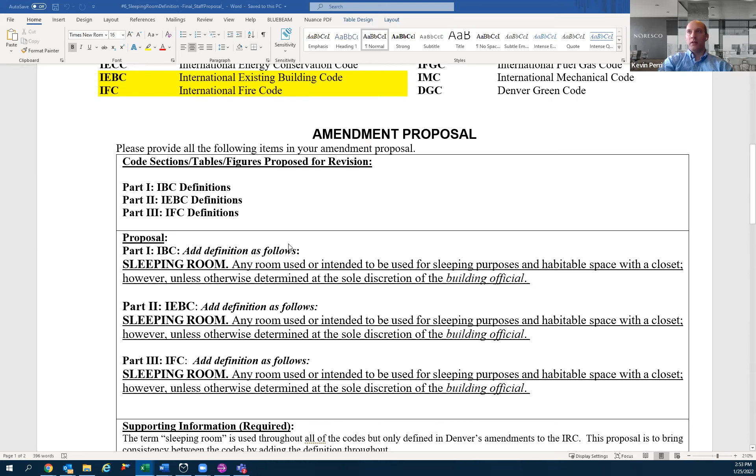Okay, item number 6. Looks like Michaela has this item as proposed list item. I don't know if Michaela's on. If Michaela's on, go ahead and raise your hand so we can have you give an overview of this proposal. Not seeing anything again, Michaela, if you're on the line and wanted to give us a summary of this, please raise your hand. Ask one more time, if you're wanting to give a summary on this proposal, please raise your hand so we can unmute you.

Okay, so I don't see, I will say, John is in the chat, it says that Michaela is sick. I'm happy to give a brief on this one if you want. Sure, go ahead, Shauna. So this was her attempt to create some consistency between the codes right now.

The Denver amendments to the IRC are the only place that a sleeping room is really defined. So I did a search: IBC uses the word sleeping room 23 times, the IEBC 3 times, and the IFC 23 times, but they're not defined. Usually you'd say, well, if it's defined in another code then it's okay, but the IBC does not link over to a definition in the IRC like the IRC does to the other codes. So this is just Michaela's attempt to make sure that this definition is used the same in all of the codes.

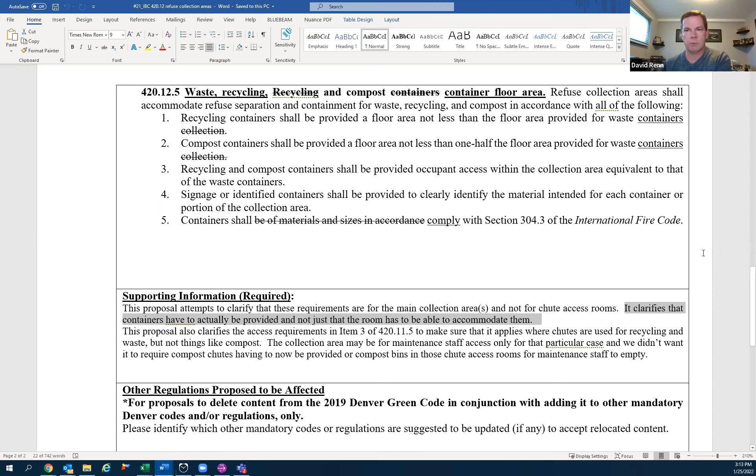So this proposal is kind of opposite of what the supporting information says. I apologize for that. But it clarifies that we're really talking about floor area that has to be provided for the containers. If you do provide the containers, there's some requirements that point you to the IFC that they have to meet, but it doesn't actually require you to put the containers in. So that's one clarification in here.

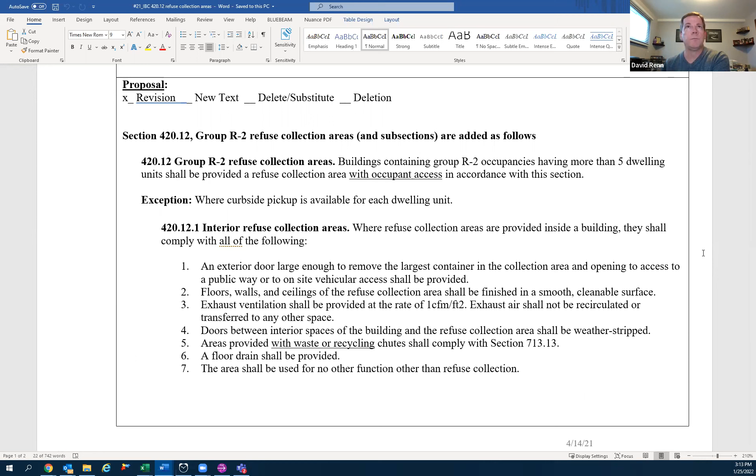And then the other part is the occupant access. In 420.12.5, item 3, it currently says the recycling and compost containers shall be provided occupant access with collection area equivalent to that of the waste containers. So we often have in apartment buildings recycling and trash chutes in the building, and the occupants of the building have access to those, but they might not have access to the room that this amendment is intended to address.

That might only be available to maintenance personnel in the building. So if that was the case, this item 3 would say, okay, well, I need equivalent, the same occupant access. So if I'm providing recycling and trash chutes, now I also have to provide compost chutes. And that really was not the intent. The intent was that the occupants of the building need access to the actual refuse collection area, typically at the grade level of the building. So that's what that first part of this proposal does, adding in occupant access in the first section. Beyond that, there's a couple of little editorial cleanups to go along with it, but those are the main two items.

Thank you. Okay, thanks for the summary, David. Shauna, you have your hand up. You want to go ahead and speak?

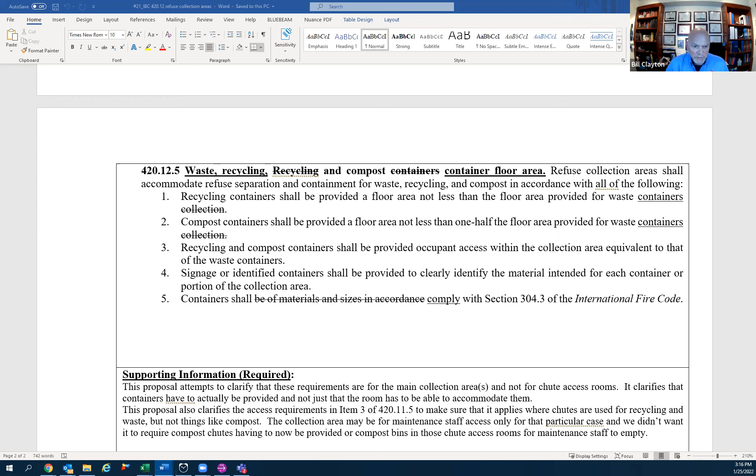Yeah, David, I can't see the whole proposal on my screen, but what do you presume the cost of this would be? The added cost to construction? None really, because this section's already in our code, these requirements for the refuse collection areas. This proposal is really some clarification items in my mind, questions that have come up since we added this to the code. I'm just trying to clarify it, but the requirements are already there in the code. All right, so it's not a new requirement, it's just a clarification to what's already there. Correct. All right, thank you.

And next up would be Yvette. Yeah, I think it just provides clarification. I agree with it. I think it's pretty straightforward. My only question was, and you answered it, David, when you did your presentation, was just if there are no chutes for the compost, how will the compost be disposed of? And you answered that when you went over the second section, saying that it's just accessible to the occupants. So that answered my question. So, yeah, thank you.

Anybody else from the committee that wants to speak on this either way or have conversation? Seeing none, I will open it back up to the general public.

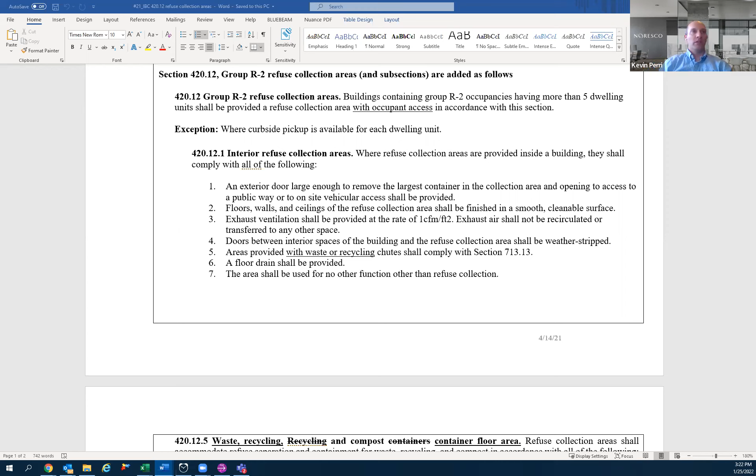So David, I had marked initially as present. I'm not sure if something happened during the meeting where it kicked him out of being able to have his video on and vote, but he was in the original tally. Yeah, and then the screen glitched, and when it came back, I was no longer a panelist. So I don't know if you caught my votes on the last two.

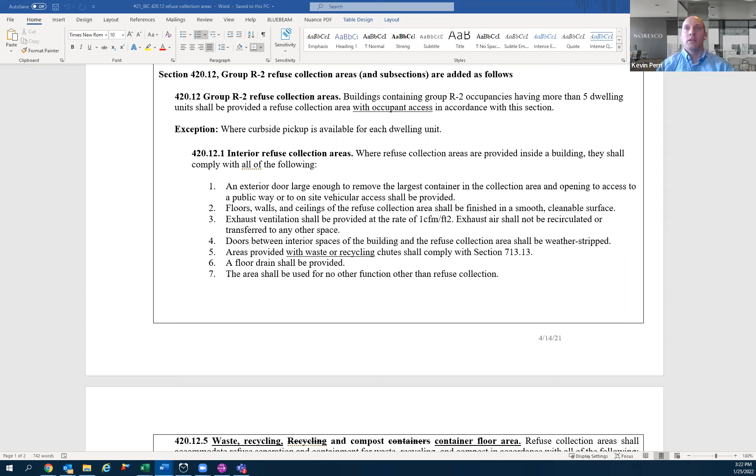Yep. Okay, so 7 to pass. All those in favor of approving this proposal as written, please raise your virtual hand. One, two, three, four, five, six, seven, eight, nine, ten, eleven, twelve, thirteen. All right, it's approved unanimously. Go ahead and lower your hands.

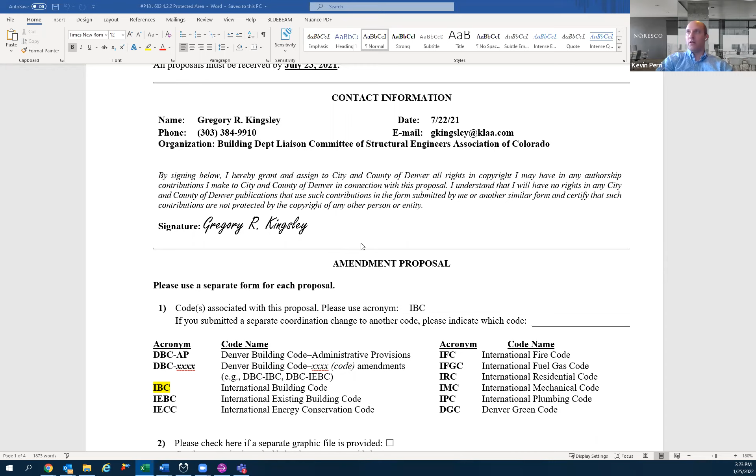So this is from Gregory. Let's see if Gregory is on the line to give us a summary on this. He is, okay. Gregory, give it a minute and you should be able to turn your video on and give us a summary on your proposal. Oh, hang on, working on video. Slow to respond. There we go. Here I am. Okay, I'm Greg Kingsley. So Gregory, just tell us who you're representing, and then go ahead. Okay, I'm Greg Kingsley, and today I'm representing the Building Department Liaison Committee of the Structural Engineers Association of Colorado.

And I'm speaking for an amendment proposal associated with section 602.4.2.2 of the code, which specifically addresses type 4B mass timber buildings. I'm not going to read the whole thing, but I'll try to read the important sections and do a little summarizing. Starting from the top, this is about protected area and fire protection of mass timber elements. So 602.4.2.2.2, protected area, says interior faces of all mass timber elements, including the inside face of exterior mass timber walls and mass timber roofs, shall be protected in accordance with section 602.4.2.2.1.

And then there are exceptions. Those say that unprotected portions of mass timber ceilings and walls comply with section 602.4.2.2.4 and the following. One, unprotected portions of mass timber ceilings and walls complying with one of the following, and there are 3 different provisions. The proposed changes affect 2 of those. The first is 1.1: unprotected portions of mass timber ceilings, including attached beams, shall be permitted and shall be limited to an area less than or equal to 100% of the floor area in any dwelling unit or fire area. So the change proposed here is primarily changing from 20% to 100%, allowing exposure of the complete area of the ceiling, with the language 'less than or equal to.'

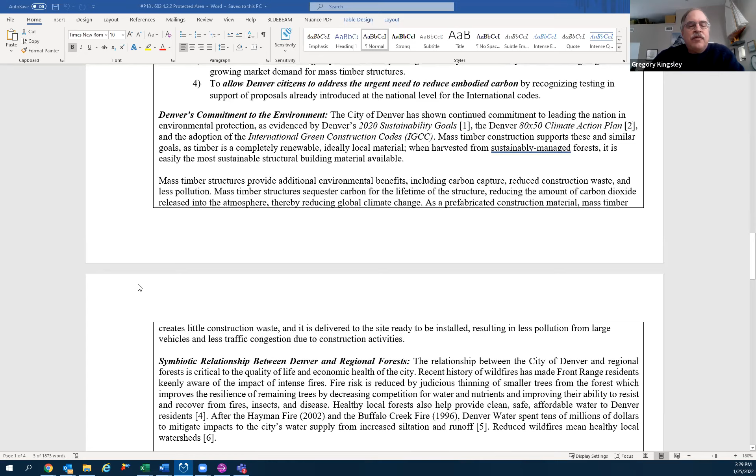The fundamental reason for the national change was that original limitations, specifically the 20% exposed area in the ceilings, were driven not so much by scientific reasons as by the fact that the Tallwood Building Committee agreed only to include provisions or criteria that had been tested. In the previous fire test at ATF, physical limitations of the testing facility did not allow them to expose more than 20% of the timber. In the last code cycle, over the last 3 years since adopting the Tallwood provisions, they went to RISE, a Swedish fire testing facility, where they were able to do the tests outdoors without those kinds of limitations. They were able to show in 5 different tests that exposing 100% of the ceiling, even with adjacent exposed timber up to 78 and 90% of the floor area, met their criteria. Even with that, they're not proposing any change in the exposed wall area, just to expose 100% of the ceiling area. That was the driver for the national provision.

I think that in the context of the Denver amendments, the important issue is: why should Denver be adopting these early? Why don't we just wait 3 years until it shows up in the 2024 IBC? The arguments in favor are really the same as what were proposed 3 years ago when SEAC asked that we adopt all the Tallwood provisions early, which we did as the City of Denver. Those provisions are now incorporated in the 2021 IBC, and the amendments are no longer necessary. I'm proposing to do the same thing with this small change.

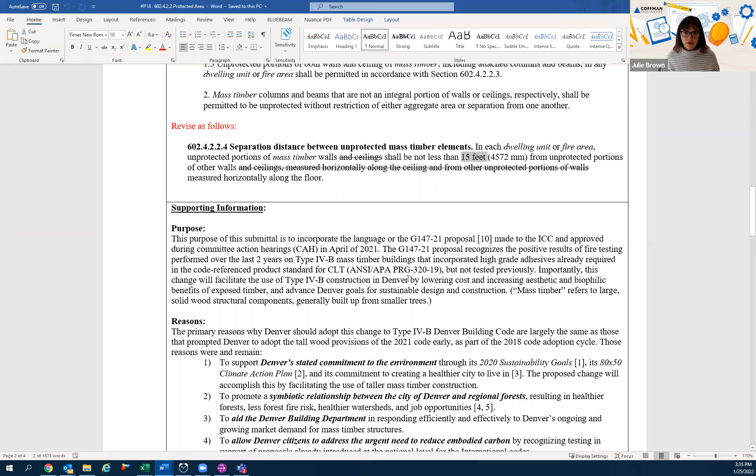Julie: Yeah, I just wanted to say, Shauna, thanks for filling us in on that. Without knowing that this was exactly the same as the 2024 language, and without knowing that it had been cleared in the September hearings, I went and did my own reading of the RISE test report, and I felt comfortable with the test that they did. I felt that the code language they're putting in, especially for separating the walls 15 feet, addresses the major concern out of that RISE report, which is that if you have exposed wood in a corner, two walls in a corner, you could have compromised fire decay. So I just want to say that I feel comfortable with this amendment.

Thank you. Keith, you're up next. Rats. Keith, you're on mute. I think you did the opposite there. Hit one too many times.

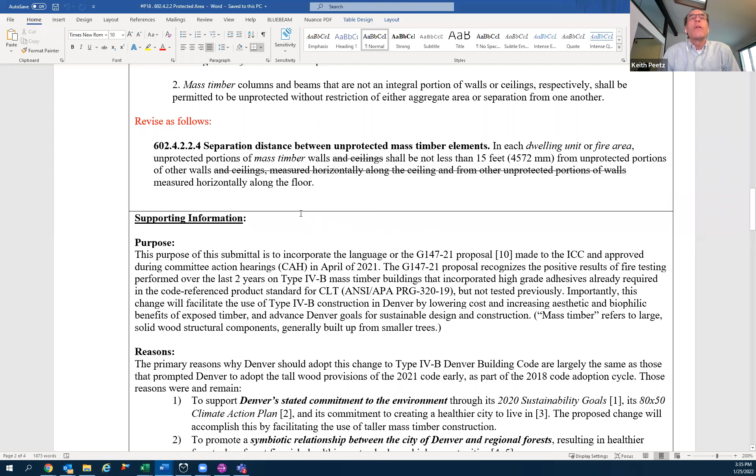There you go. Well, I was wondering if I'd like to propose a change to exception 1.1. I would wonder if it would be better grammar to say unprotected portions of mass timber ceilings, including attached beams, shall be unlimited, rather than limited to an area of less than or equal to 100%. That's unlimited in fewer words. Anyway, I don't know that it's that, well, shall be unlimited in a dwelling unit or fire area. I would propose that we make that. I will propose that approved as modified if it gets to that point.

Okay, noted. Thank you. David, you're up next.

Just one comment on Keith's comment there. I don't disagree that might be better wording, but this is the way the 24 code is going to be. So if we do push this or pull this forward, the idea is our amendment would just go away in 2024 rather than creating a different amendment to reword it. So I think I'd propose keeping it the same.

But just a couple other comments to what this proposal does. It will lower the cost of construction a bit for this type 4B construction. We pulled this mass timber into our code 3 years early. We really haven't seen many projects, if any, use it yet. We have heavy timber projects, but not the new types of construction. I think part of that is the barriers in the code in terms of how much gypsum board protection is required. This lessens that requirement, reduces the cost of construction, and hopefully will encourage this type of construction a little bit more, which I think is in line with Denver's climate goals. Lastly, on a selfish note, I review and approve administrative modifications for our group, the architectural and structural group. If we don't get this in the code, I'm guessing I'll be getting one admin mod every few months for this one particular issue. So I'd just soon get it in the code than have to keep approving admin mods for it. Thank you.

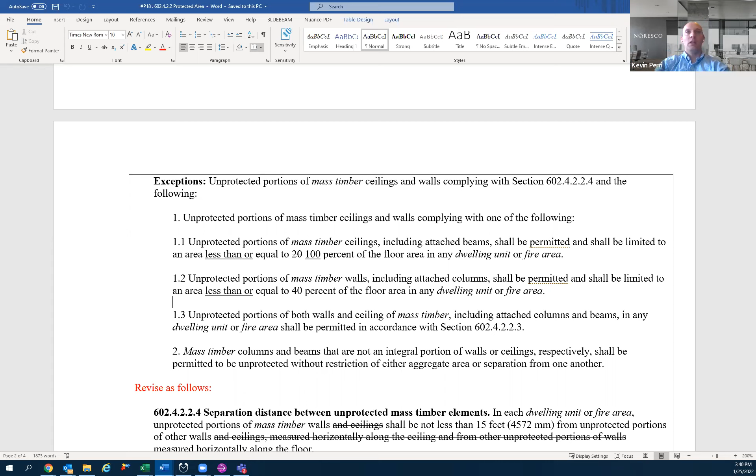So good job. Thank you, everybody. So that brings us through, I believe, that P18 on there. So with that, we're about halfway through.

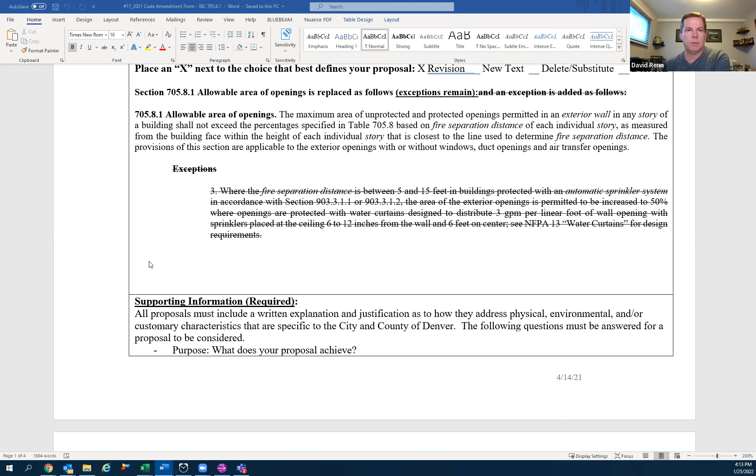One of our fire protection engineers from DFD will be speaking about this a little bit more after me. It should be noted, this proposal does not affect existing buildings. The existing building code has some provisions that I outlined in the proposal that will allow up to 50%, so buildings that have used this in the past won't be affected.

Lastly, I just want to mention I gave a history in the proposal. I won't go through it in detail, but this amendment goes back to 1991 UBC. Exterior wall opening provisions have changed drastically since then. The opening allowances have gotten more restrictive, more refined. Our amendment has essentially stayed the same since then. So I would urge your support of this proposal.

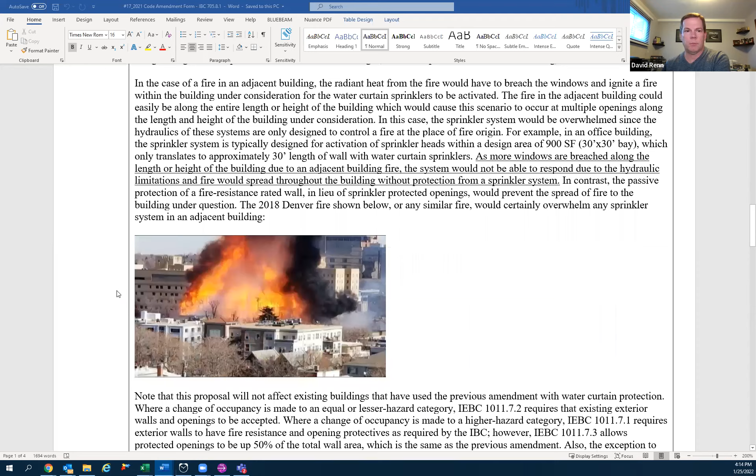This would bring Denver in alignment with the building code regarding this critical fire protection requirement, and really bring it in alignment with every other jurisdiction that has to deal with this in the IBC. I don't know of any other jurisdiction that allows such a thing as this. So with that, I just urge your support.

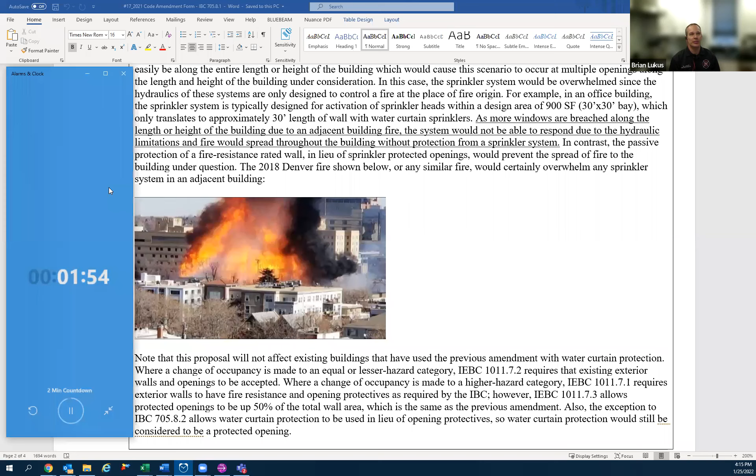Good afternoon, everybody. Brian Lukus, Denver Fire Department. I've been with the department for 14 years. I have 6 years of private consulting experience prior to that, and I have a master's degree in fire protection engineering. I'm in support of removing this current amendment for multiple reasons.

The first is that the exception allowing water curtains specifically references water curtains in NFPA 13. This NFPA 13 section is not designed for exposure protection. It's also not designed for any limitation of radiative heat transfer, which is your primary mode of heat transfer in an exposure fire. This section is intended to and specifically referenced in NFPA 13 for vertical openings and proscenium openings. That's it. On an interior vertical unprotected opening, typical 4-story convenience stair, the intent of this section is to stop fire from rolling up your chimney, your opening, and to keep it on the floor and allow the system to operate. It's not to stop radiative fire across your opening. It's used in conjunction with the draft curtain, again, to hold heat on the floor of the fire to allow the sprinkler system to operate.

Secondly, when you're using this provision, you are not required to calculate every sprinkler around the opening when you're using closed sprinklers. You don't calculate every floor of your opening when you're doing a stair, and you also don't require a calculation of every window. So that means that if you have an exposure fire from across from a neighboring building, you may only have one window calculated to operate during an exposure fire, which is not the intent of the protected opening provisions, which would require all of the building. So again, this amendment as currently written lessens the code below national levels of safety, and I urge you to support and approve as written. Thank you.

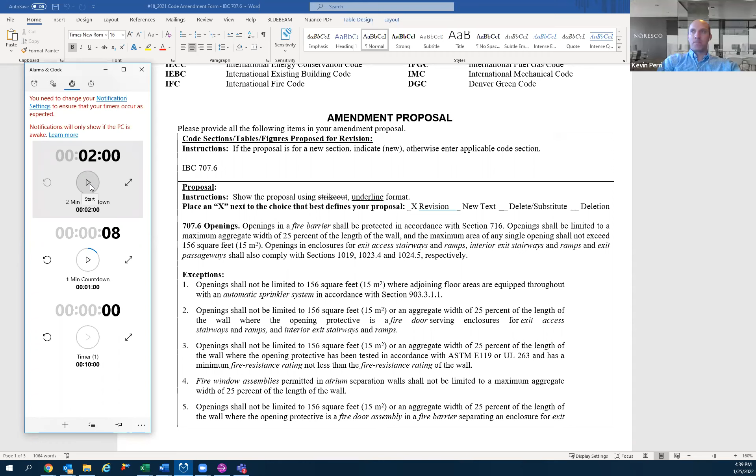And you look like you're trying to get on. You'll be speaking in support of this. Hello, hello. Okay, we can hear you there. We go, sorry about that. Hello.

Yes, Mark Jelinski, fire protection mechanical engineer, consulting engineer, Denver practice. And yeah, we need this. We've known this for a long time. Fire dampers in shafts are another thing that's illegal right now. The alternate to doing this, especially say overhead doors, is the listed movable fire wall, the Won-Door, as a brand name. And yeah, you don't want to do that just in these kind of applications. I think that this absolutely covers the issue. One place that is of interest is cases where you would otherwise have a Won-Door required. Sometimes there's fire barriers that are intended to separate occupancies, and I think it's valid that what you're doing here, you're not doing it in a fire wall, and therefore I support this too. I'll leave it at that. This is a needed amendment. Thank you.

Thank you, Mark. Anybody else from the general public that wants to speak in support of this, please raise your hand. And I see Shauna, you do have your hand. Okay, you lowered it. So now that there's nobody else from the general public in support, anybody from the general public in opposition that wants to speak, please raise your hand. Anybody in opposition from the general public that wants to speak, please raise your hand. And last and final call for the general public, anybody in opposition that wants to speak, please raise your hand.

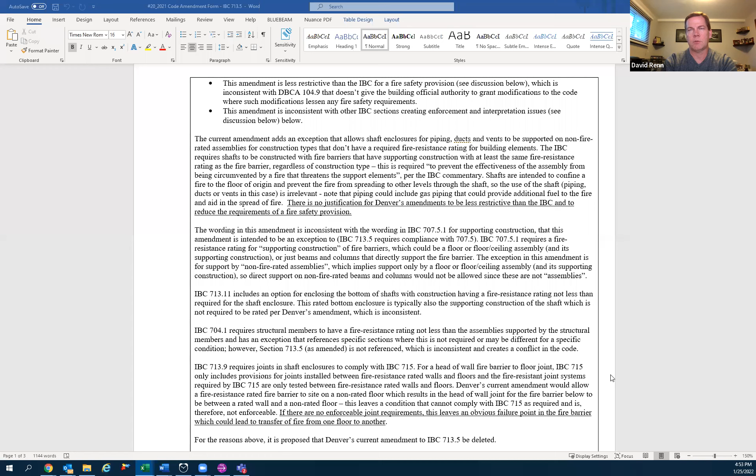Section 713.11 for bottom enclosures of shafts requires the construction to be the same rating or at least the same rating as the shaft. Well, this assembly at the bottom might be supporting the shaft above. So we have the base code saying it needs a fire rating, then we have our amendment that says it doesn't need a fire rating. Which one governs? I don't know. 704.1 requires structural members to have a fire resistance rating not less than the fire rated assemblies that it supports. That section does have a bunch of exceptions, but unfortunately one of the exceptions is not this one. So we have one section of the code saying I need a fire rating, and then you get to our amendments and it says we don't. So which one controls?

Lastly, section 713.9 for fire resistant joint systems would require the joint at the head of one of these walls—let's say it goes to the underside of the floor, and then you have another shaft wall above the floor—it requires that joint to be a fire resistant joint system. Well, if that floor is non-rated because of our assembly, you can't comply with that section, because all fire resistant rated joints are tested between fire resistance rated assemblies. The wall has to be rated and the floor has to be rated.